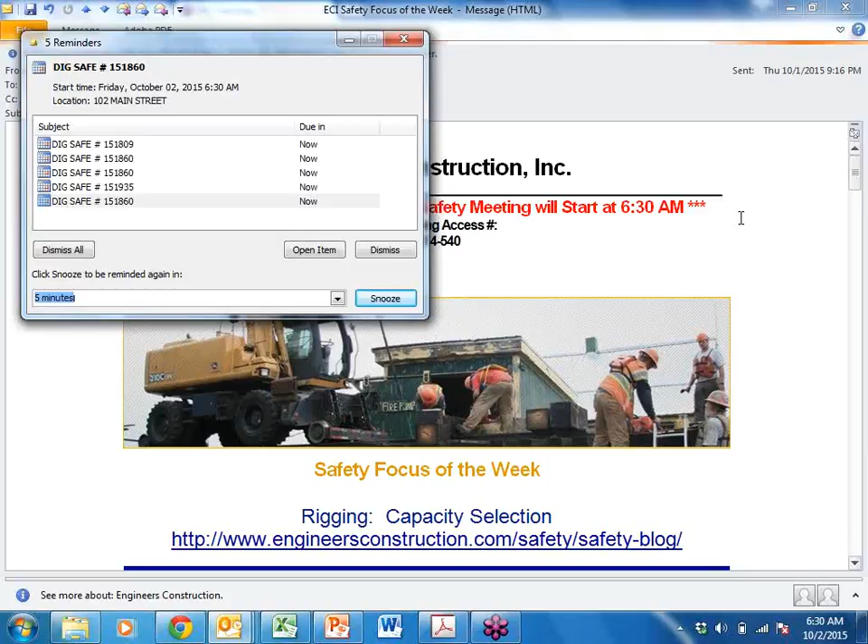Morning. Okay, it's 6:30. We'll get started here. Code of conduct item of the week is to drive safely, defensively, and courteously. And I know most of you know that I'm a bicyclist, so I really have a vested interest in making sure everybody on the road drives that way. And I'd have to say that most people are. I don't have much trouble on my bicycle, so I think people who have problems are usually people who create problems out on a bicycle.

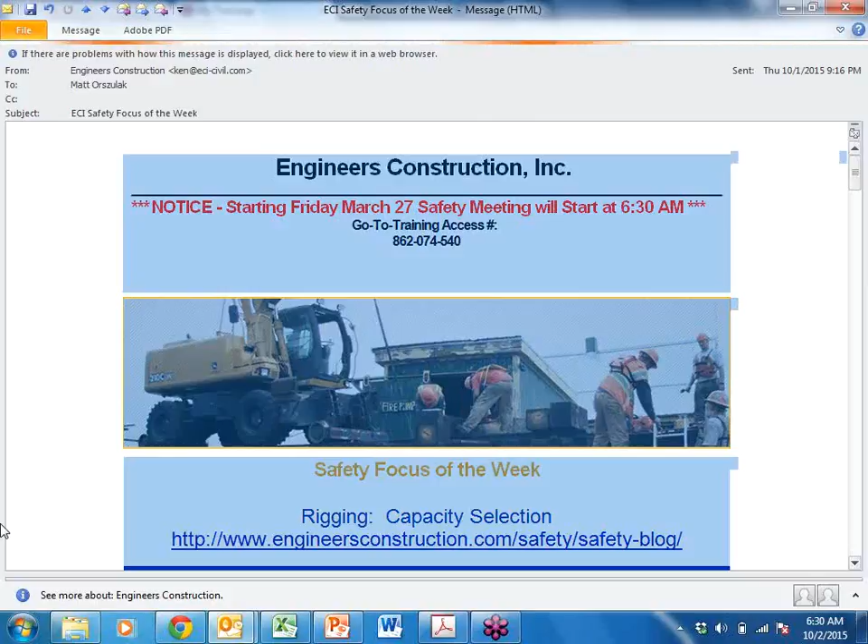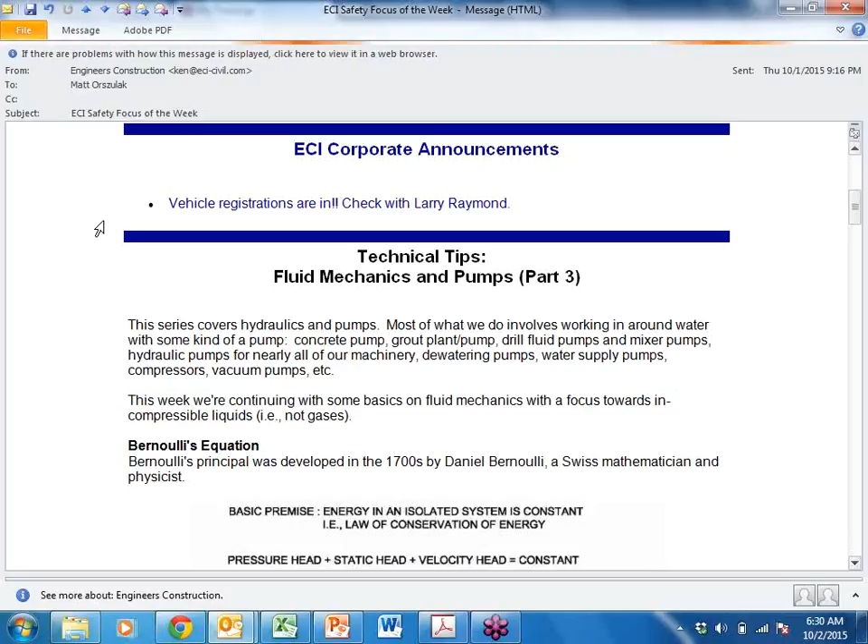So we're going to talk in a few minutes about rigging again, kind of an ongoing discussion, because rigging is obviously a fairly extensive topic for us. Corporate announcements. Larry reports to me that he has a boatload of registrations that need to be passed out. So make sure you check with him. I'm sure you've got a vehicle on these crews that needs one, right? Yeah. Between trailers and trucks and everything. So check with Larry.

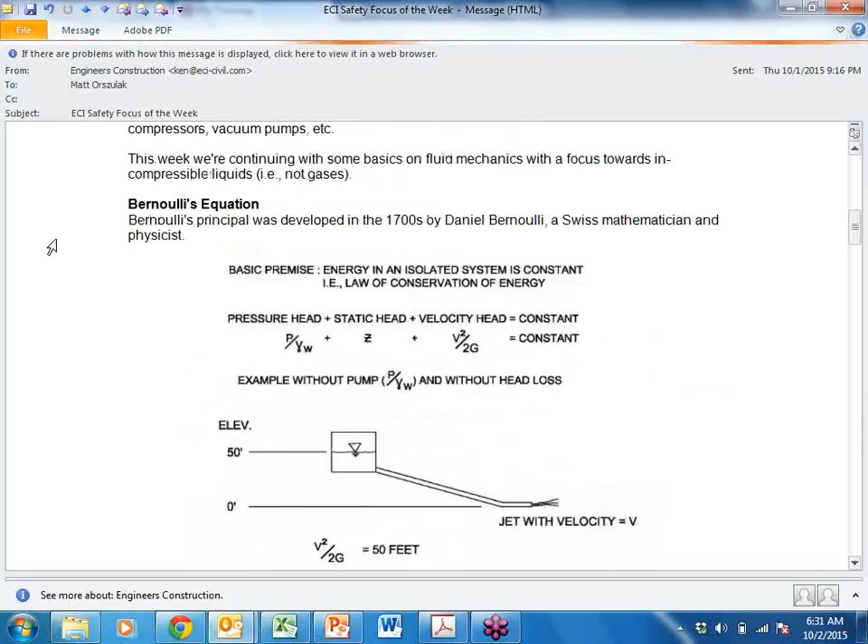Technical tips. We're still talking about fluid mechanics and pumps. There's a lot to talk about here. A lot of interesting stuff. This week, the discussion is Bernoulli's principle, which was developed by Daniel Bernoulli back in the 1700s, a Swiss mathematician and physicist. And basically, you've all heard about the law of conservation of energy, that you can't really get rid of energy out of a system or add it.

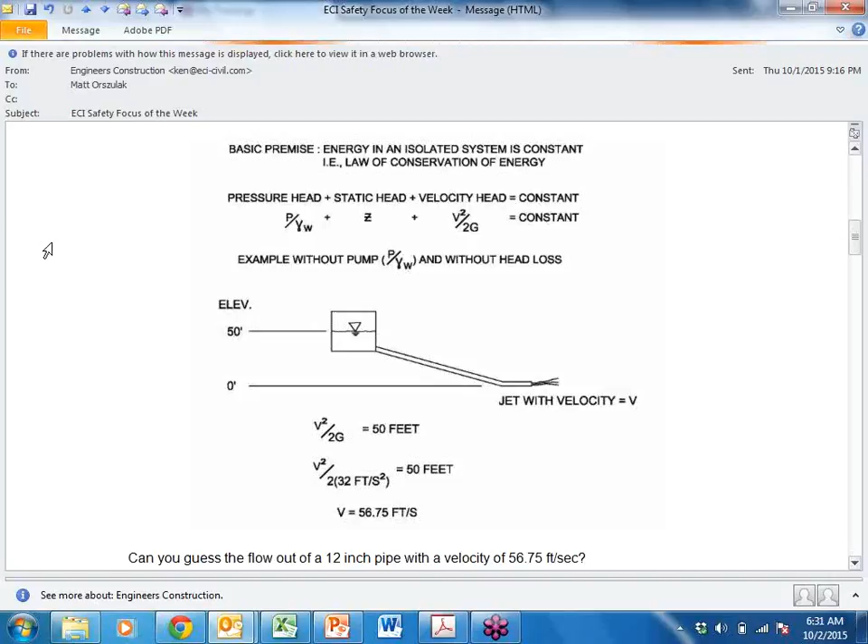It's there. So the idea is that in hydraulics, if you have a pressure head and a static head or an elevation head and a velocity head, each of these combined have an energy to them, and they're always constant. So you can't just go from a high energy state to a low without having a transition, a change in the system. So this is an example which makes a lot of sense when you think about it. Bump that up a little bit.

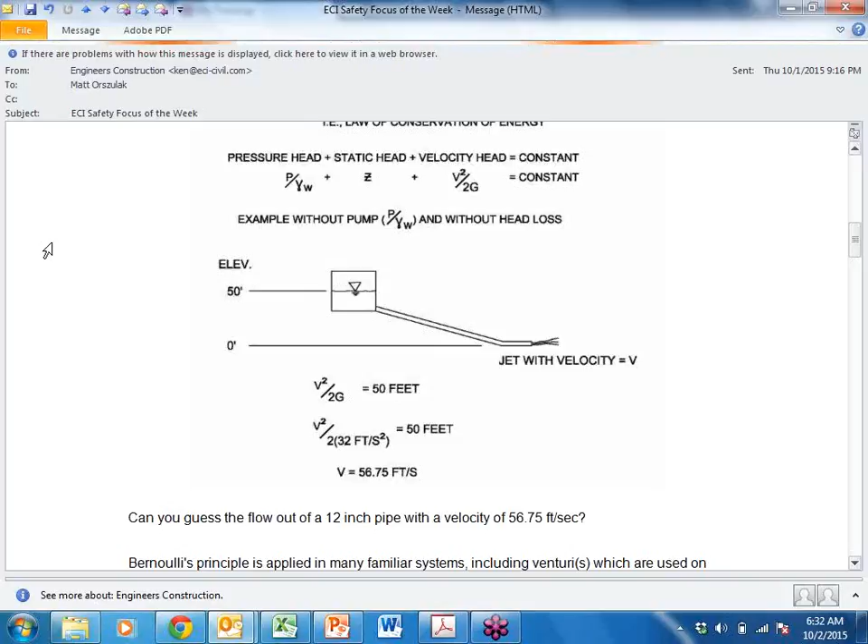So you've got a tank of water up at elevation 50, and then a line that just drains off at 0. So what happens here? You've got a state of high energy, it has high elevation, static head. This would be more like a pump pressure. I don't have a pump shown here, but you have high static head down to 0. Well, what happens? It moves, right? It gains velocity. The velocity head goes up. Since this essentially goes to 0, that goes very high.

And interestingly enough, you can actually compute what that velocity is. It's V squared, divided by 2 times gravity. And actually, the units all fall out perfectly because you've got basically a V, and then you divide by feet per second squared, and you have elevation in feet, and it all breaks out to feet per second. So kind of cool. You can figure out at your jet what your velocity is.

So why is this important? Well, one thing that this looks like is a directional drill, doesn't it? With drill steel, with fluid pushing through in a jet at the end. I'm going to change it to be a large diameter jet of 12 inches, and I'm asking a question here: can you guess the flow out of a 12-inch pipe with a velocity of that 56.75 feet per second I computed? We'll get to that at the end.

But the point here is you have a high energy, high pressure, or pressure head, elevation head state, and then it goes down to 0. So all that gets converted into velocity. So there's some other interesting applications of this principle, including Venturis. And the Venturis are used on mud mixing systems in addition to a variety of things.

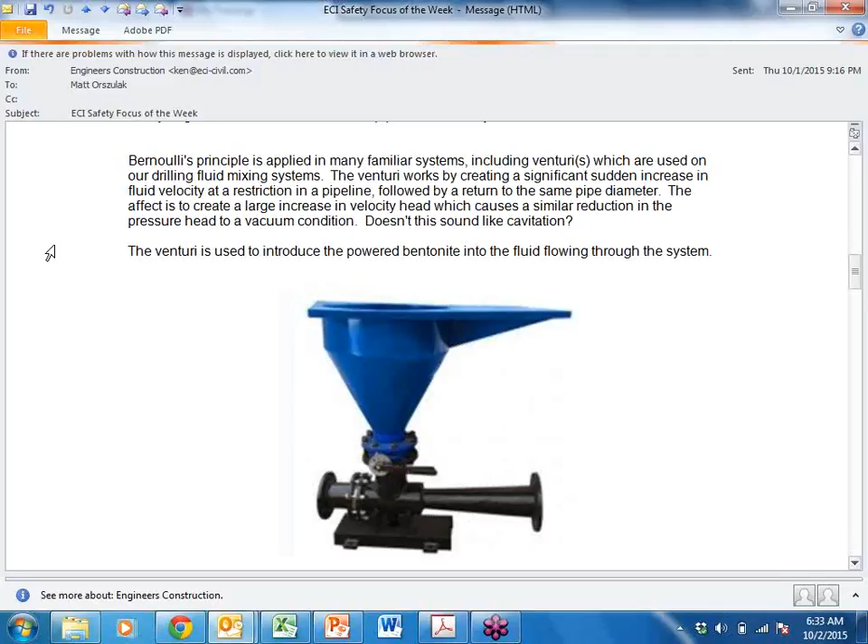But the idea is that you have a flow going through a pipeline, and it suddenly is constricted to a small area. So what happens then? It goes faster. When it goes faster, the pressure drops. When the pressure drops, it creates a negative pressure into the hopper, and it sucks in, in this case, the powdered bentonite and mixes it.

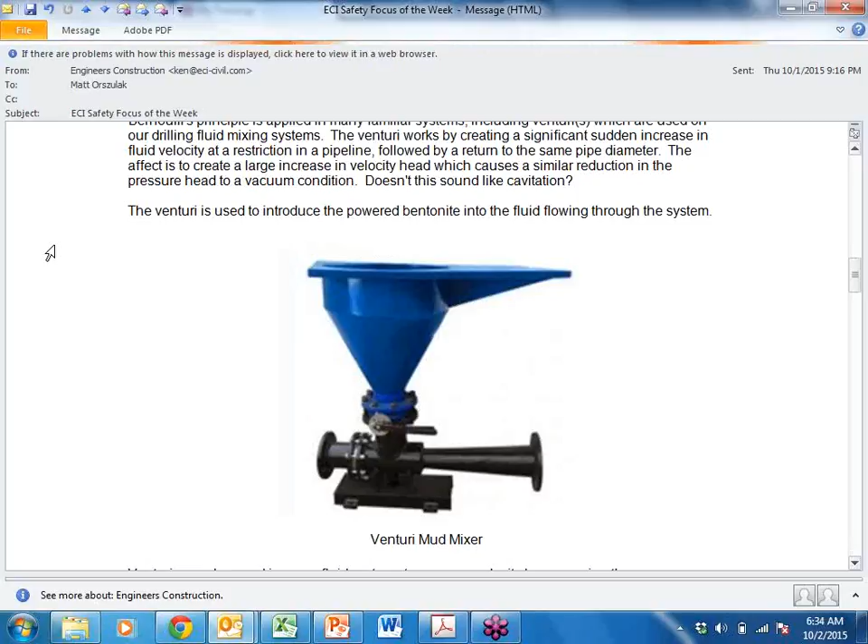And Venturis are pretty common in a lot of places, and are even used for measuring flow. This is kind of a fancy one here, but they're used for measuring the velocity and flow going through the pipe, because they can measure the difference between the pressure on the big diameter and the little diameter, and using that equation, anybody can figure out what the flow is, because velocity is related to flow.

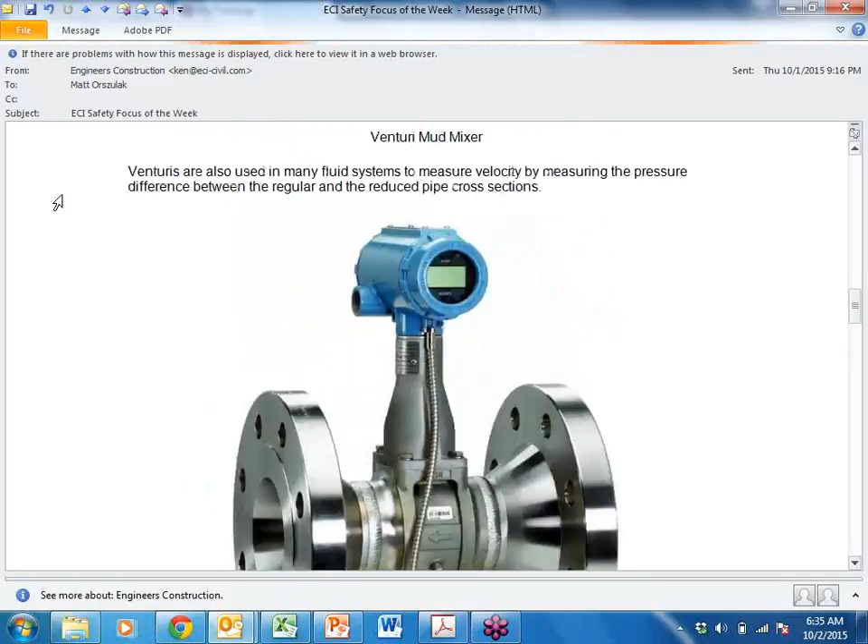And then my example, if we have the 12-inch pipe, that's 0.785 square feet in area, times that velocity is 44.6 cubic feet per second. It all comes out at 20,000 gallons a minute. So if you had a tank up there that's just letting it all loose, and remember this is without friction, kind of idealized, no losses at the jet, no losses in the pipe, no losses at the entry point, you'd have 20,000 gallons a minute coming out of a 12-inch pipe. So that also gets you thinking, well, if I have a water line that breaks and there's a water tower up there, that's a serious thing.

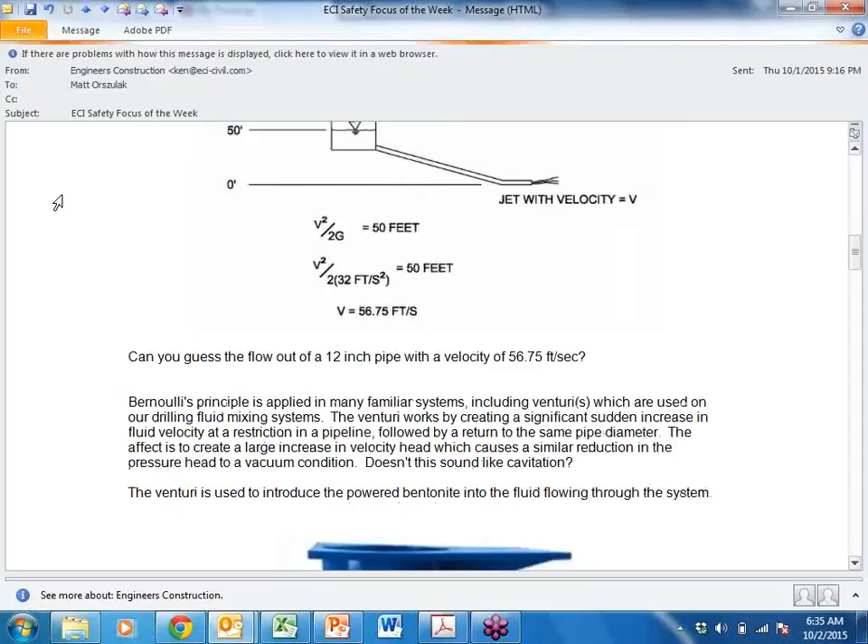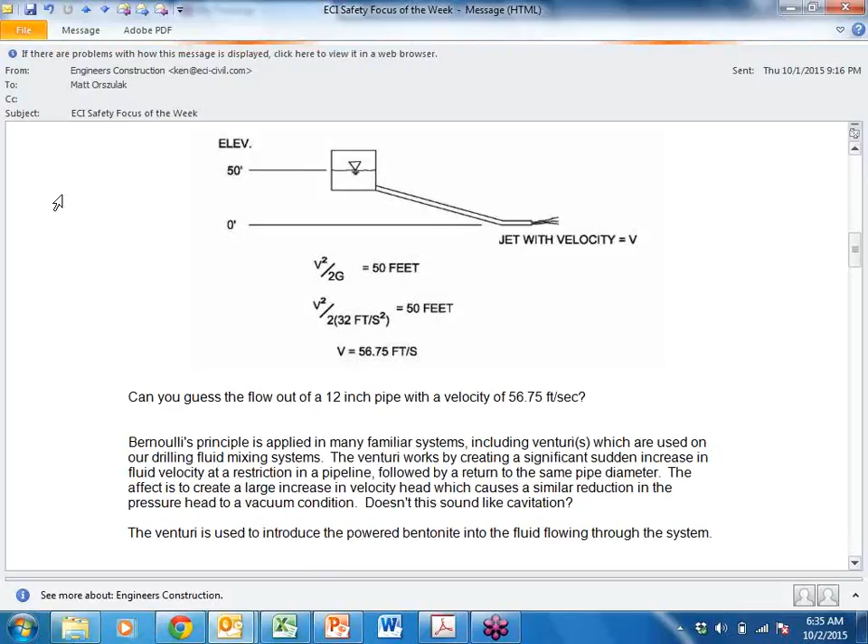And it's going to come down like that and be a real quick disaster, as we've sometimes seen. So that's just the principle, and it's kind of obvious when you think of it that way. Yeah, you have a lot of pressure, and then it converts that to a velocity. And if you think about it, also like say your garden hose, you might have 75 psi if you get real good pressure at home in the garden hose, and then once you squeeze the nozzle, the pressure drops in the hose. It all converts to velocity. Not all of it, but a lot of it.

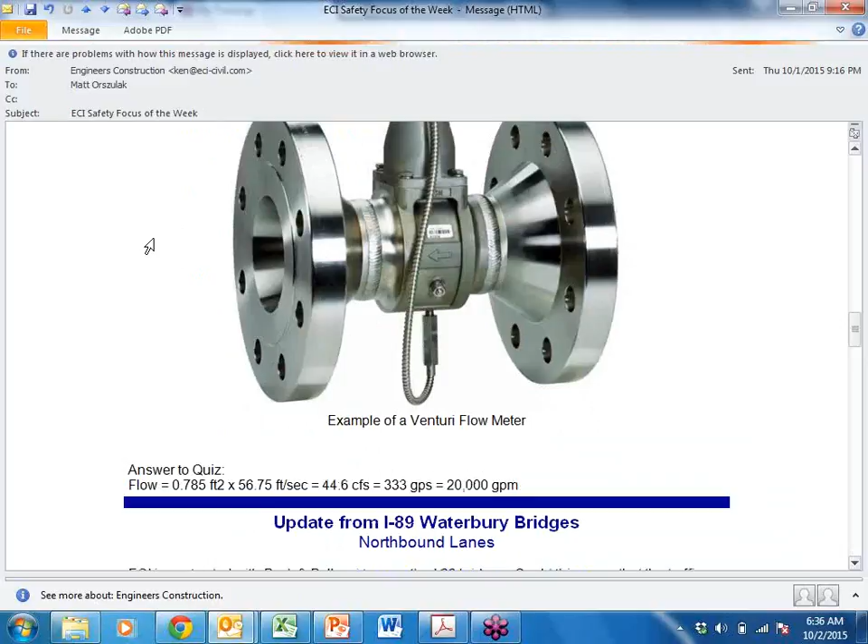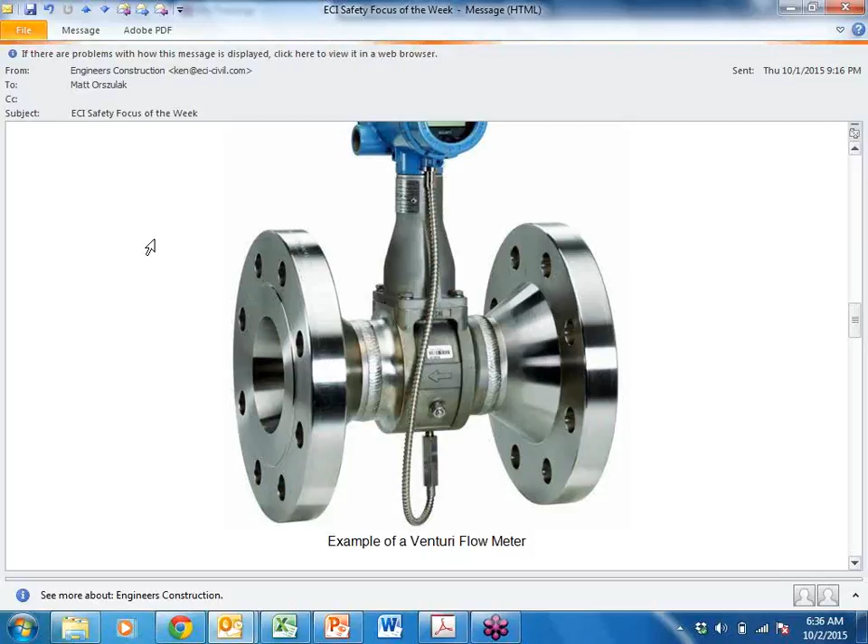That's a pretty fancy one. We have these venturis on a lot of things, right, Larry? A lot of components, whether it's measuring any kind of hydraulics or mud or anything or water. And sometimes they just use even a plate in there and measure it at the plate, before the plate, and after the plate.

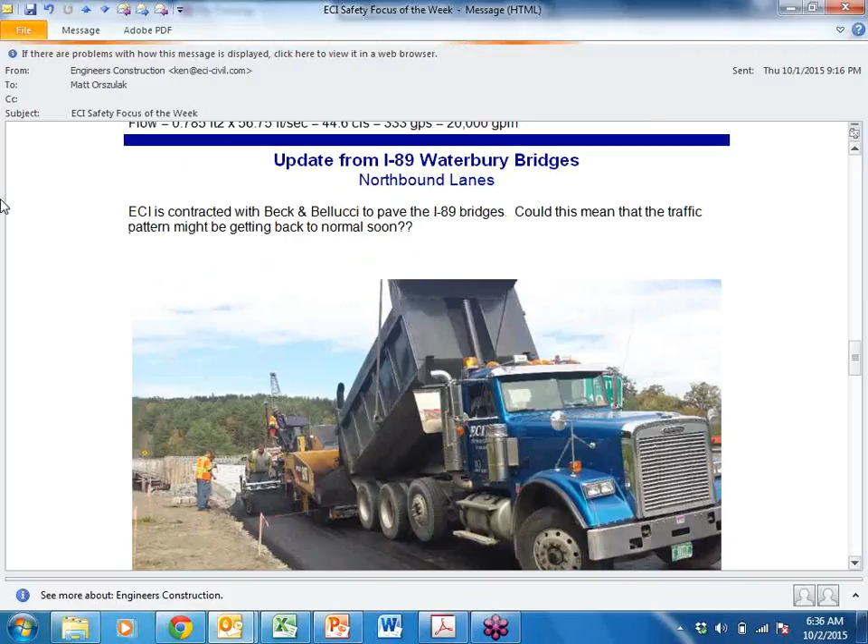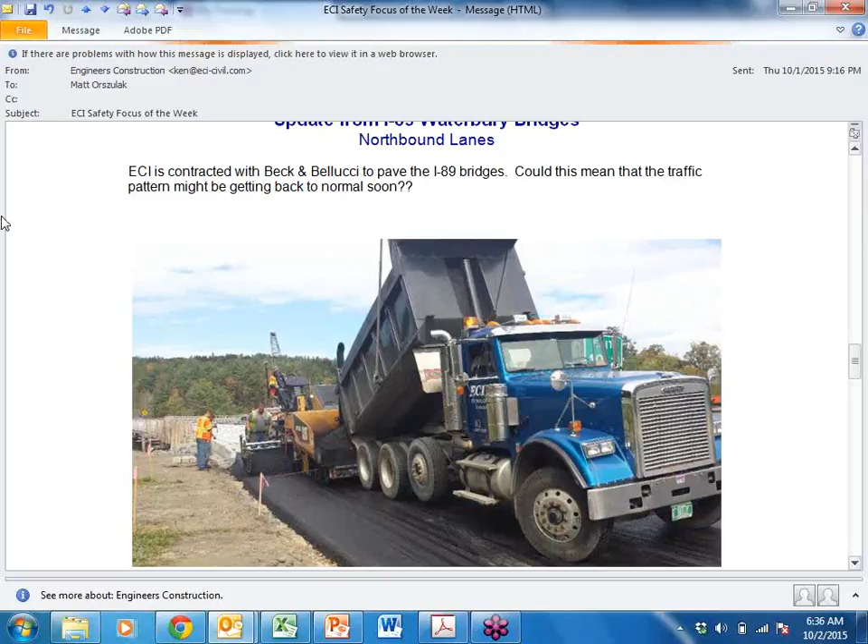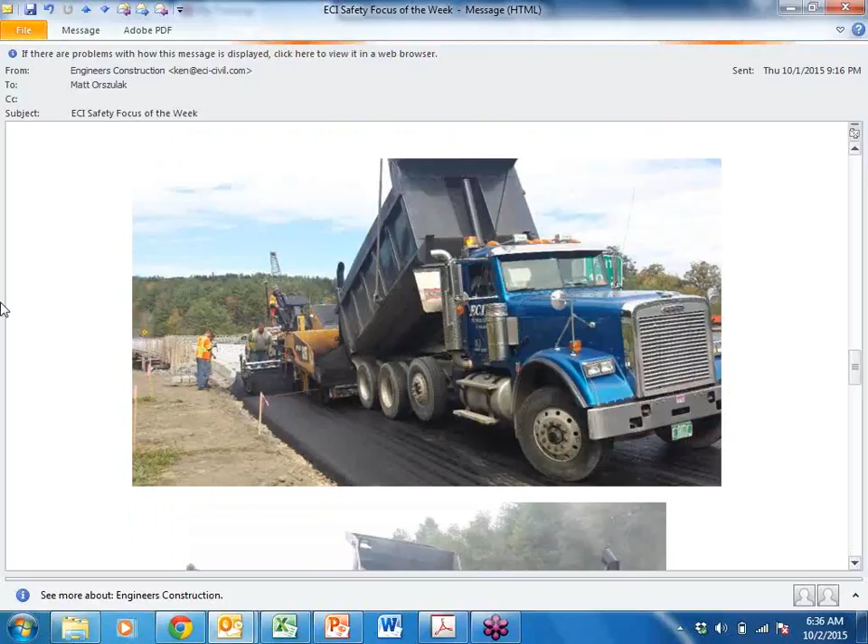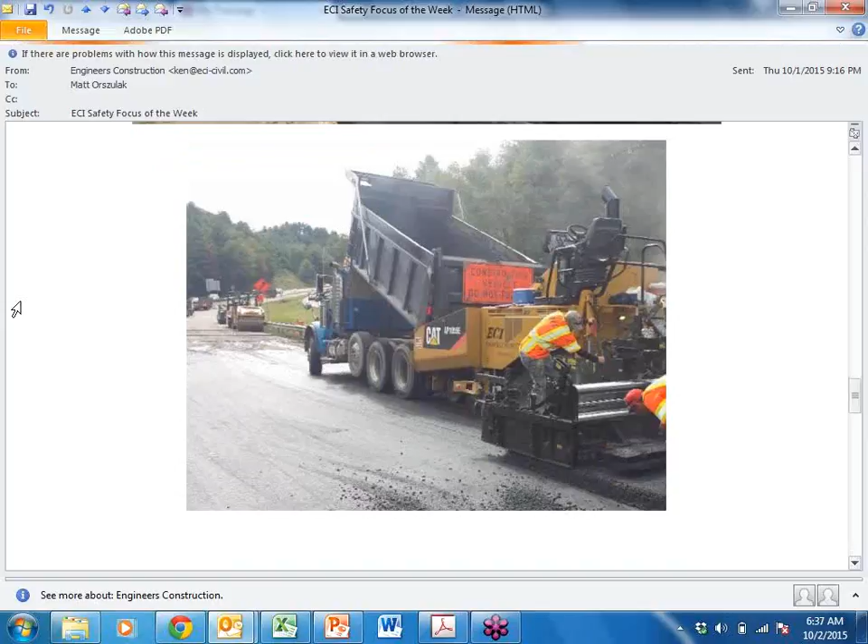So I have an update here from the I-89 Waterbury bridges on the northbound lanes. I thought this was pretty interesting because I'm kind of assuming that this could mean that the traffic in Waterbury on 89 could be getting back to normal. Would that be true? Anyone know? Yeah, they're hoping by the end of next week. Wouldn't that be great? The bridges are done paving, and finishing the temporary off-ramp will be all next season. That northbound Waterbury off-ramp will be totally rebuilt next year. Oh, okay. Paving the temporary one in preparation for next spring. Yeah, bridges are. He's hoping by next Friday or so. That's good, because everyone, myself anyway, traveling through there, you're going down to one lane and dealing with it in the slower speed, I'm ready for a change on that. So that's good.

All right, well, that's what I got. We're going to actually have a video today on rigging? Yep, video. Okay, good. So change it up a little bit. The last couple of weeks we talked about our inspections of wire rope, chain, and synthetics. Today I got two short videos about our hitches with chain, wire rope, and synthetics. It's good detail, talks some good proper rigging techniques, the difference between the basket, the choker, the bridle setup, and basket choker, and the straight pull. So we'll get started on those.

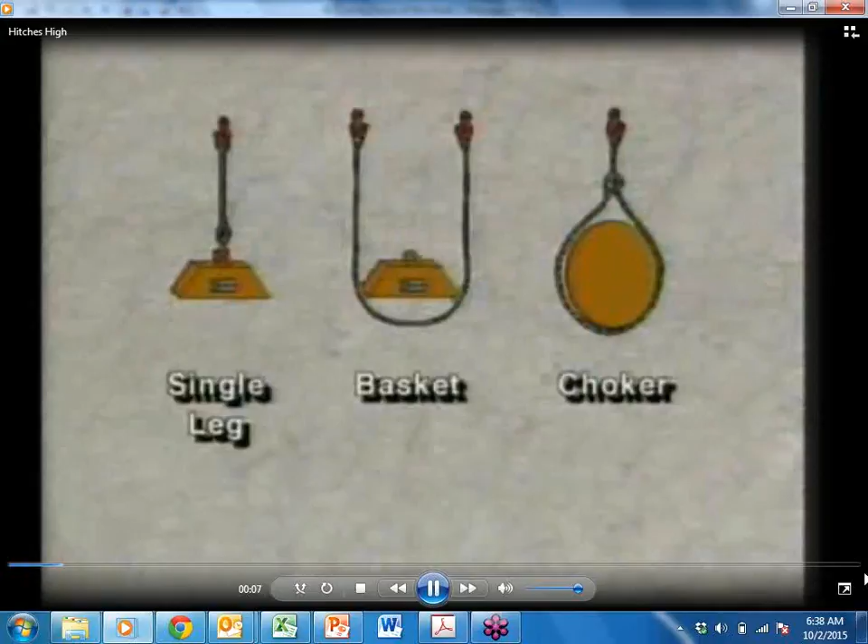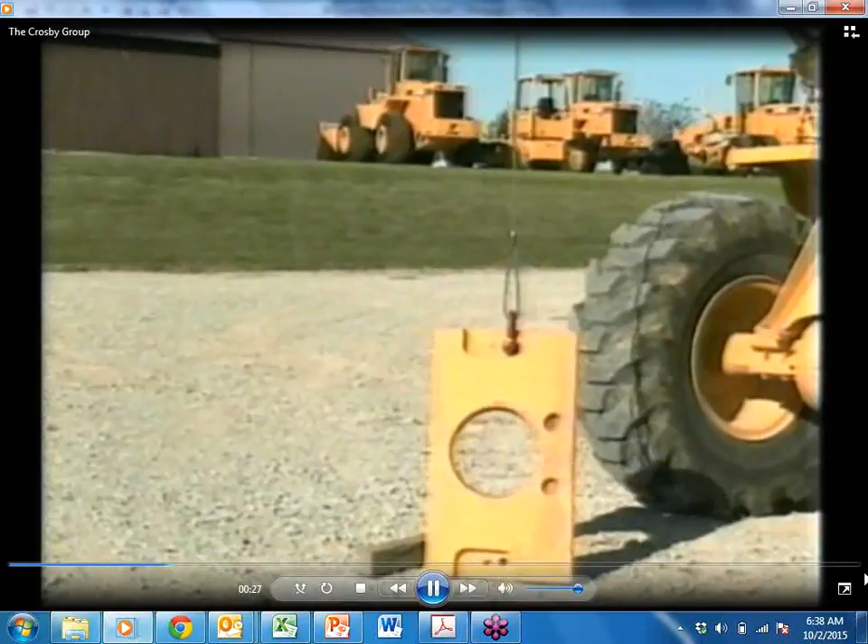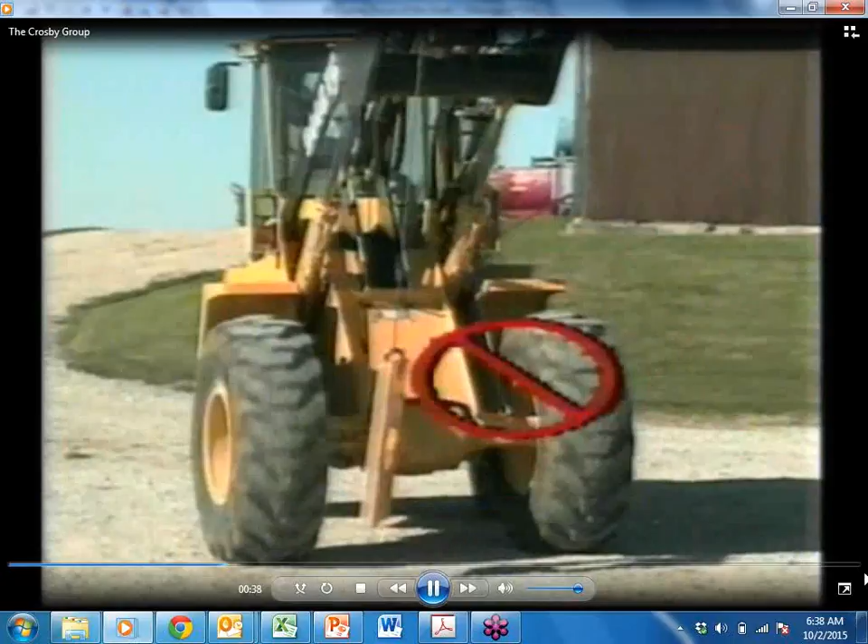For our purposes in this program, we'll discuss three basic rigging hitches: the single leg, the basket hitch, and the choker. The single leg hitch is the simplest. If the sling you're using, be it chain, wire rope, or webbing, is rated for a certain load capacity, that load capacity is the maximum weight you can hang from this hitch. Exceed the capacity, and you run the risk of an accident. A single leg is simple to hook up, but it offers no load control. It's fine for very basic lifting and setting, but don't try to move a load that's suspended by a single leg, unless it's controlled by a tag line.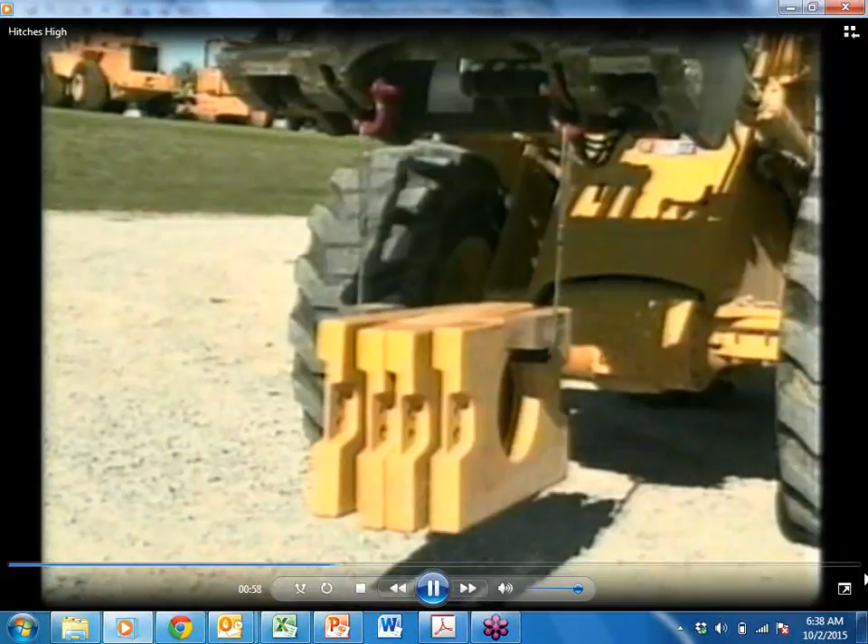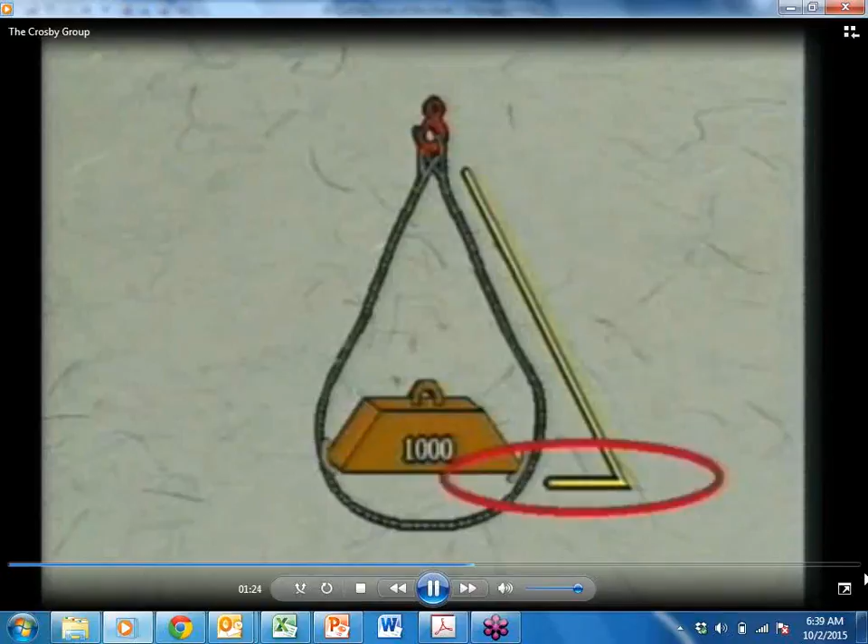The basket hitch distributes the load between two legs of a sling. A true vertical basket hitch has twice the capacity of a single leg sling. The catchwords there are true vertical basket hitch. This is a true vertical basket hitch. This is not. When you go from this to this, you reduce the capacity of the sling. How much you reduce it depends upon this angle. It's called the horizontal angle. Here's the horizon line. Here's the line of the sling. The angle between them is called the horizontal angle. The smaller or tighter this angle, the more you reduce the load capacity of your sling.

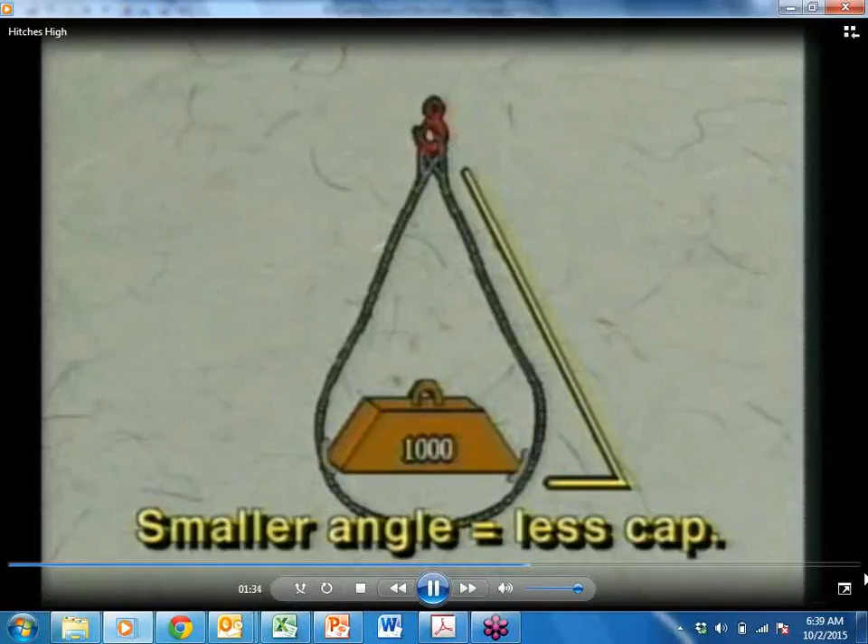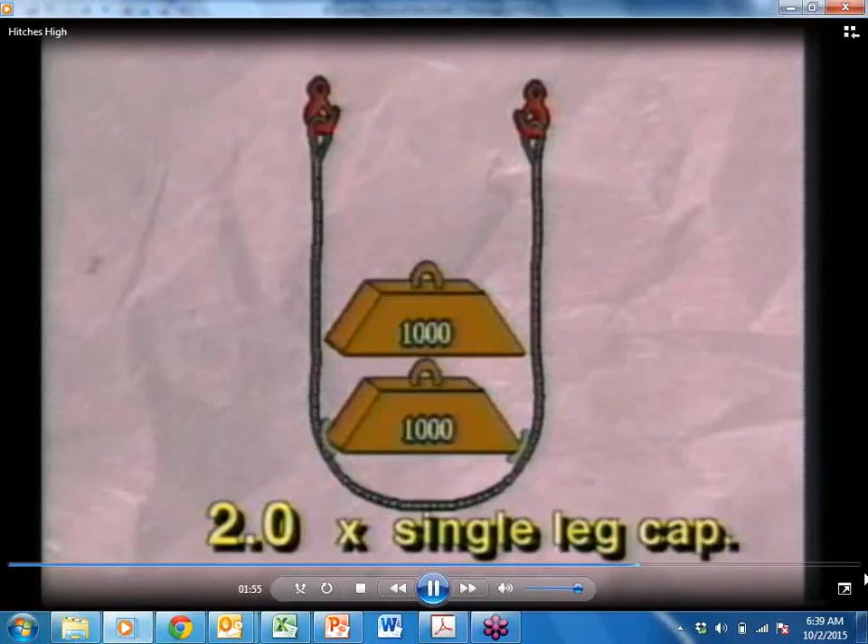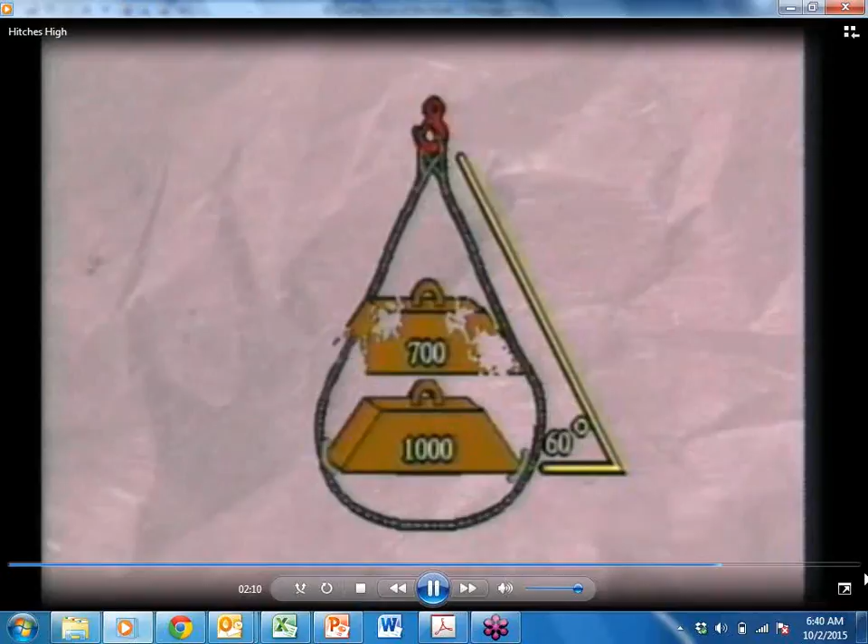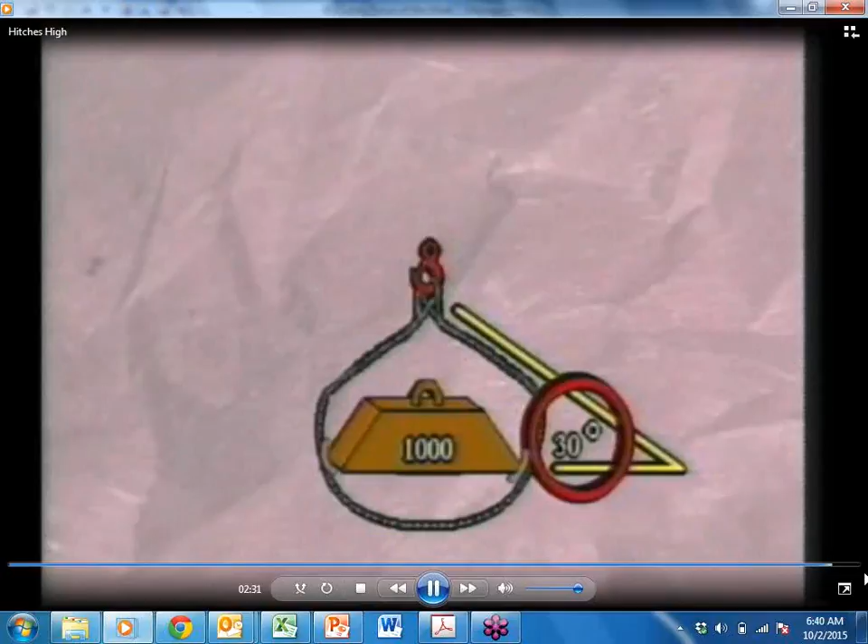To illustrate, the capacity of this single leg sling is 1,000 pounds. That's how much you can hang from it straight down. Take the same sling and make a basket hitch, a true basket hitch. The capacity of that same sling is now 2,000 pounds. That's double the single leg sling. Now connect both ends to a common point. You've just reduced that sling's capacity. When the horizontal angle is at 60 degrees, its capacity drops from twice that of a single leg to 1.7 times that of a single leg. When the angle is 45 degrees, it drops to 1.4 times. And when the angle is 30 degrees, it drops to 1.0 times, or the same capacity of a single leg sling. So remember that this angle, the horizontal angle, is important in determining the sling's load capacity.

So that's kind of straight and basket, and I have another one here for more of the bridle setup.

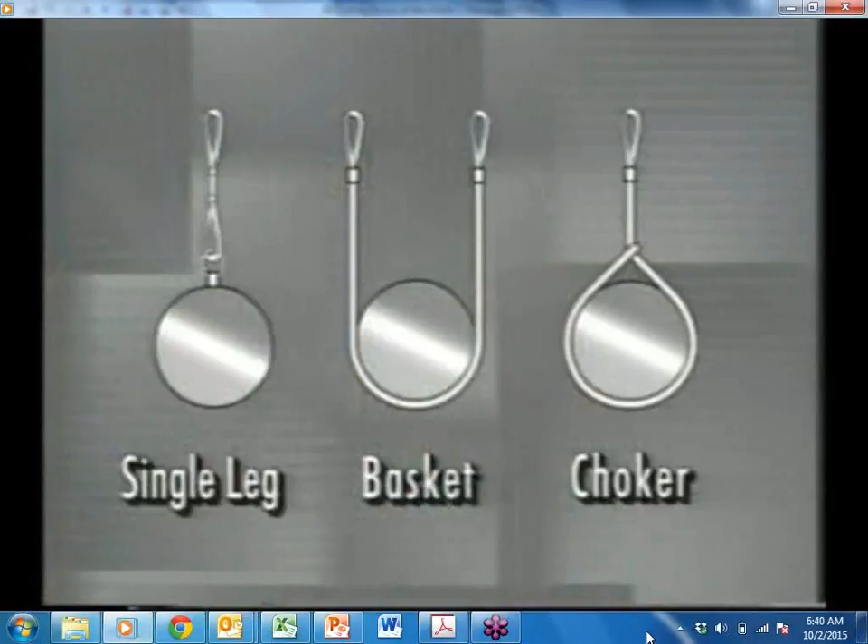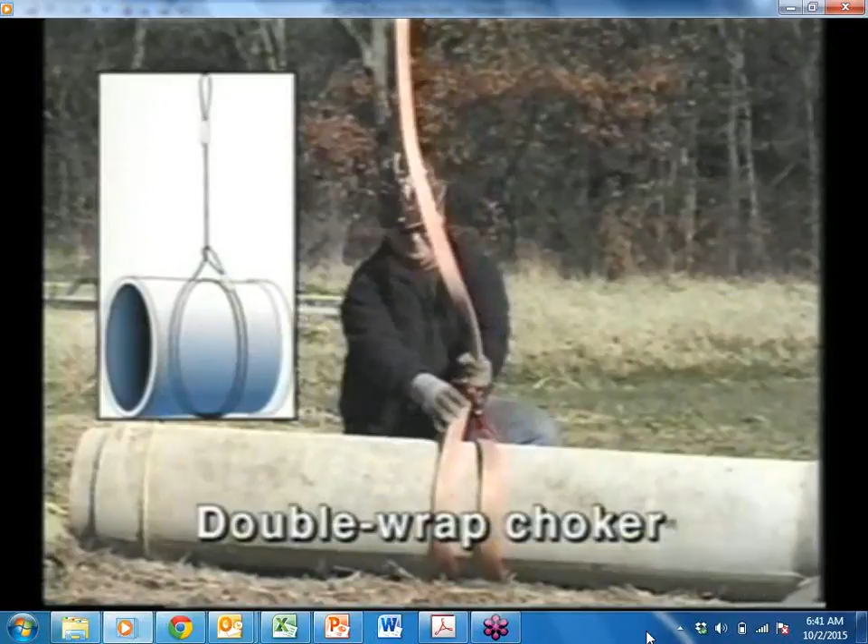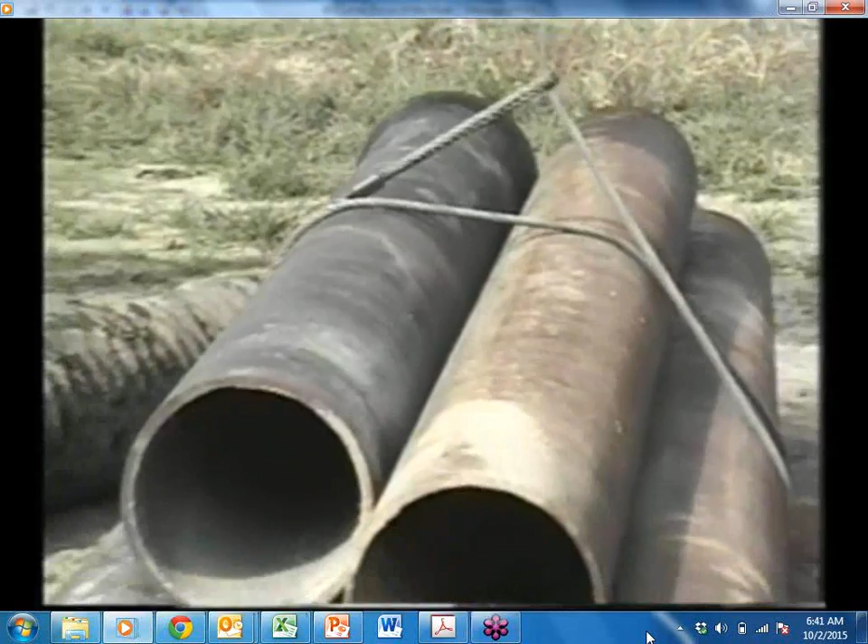The three basic rigging hitches are the single leg, basket, and choker. Here are a few tips to remember when using any of these hitches. Choker hitches are easy and convenient, but a double wrap choker hitch is better because it increases the surface contact between the load and the hitch. More surface contact means better control. It's excellent for use on loose bundles or slippery loads. It draws the load in, increasing surface contact and helping prevent slippage.

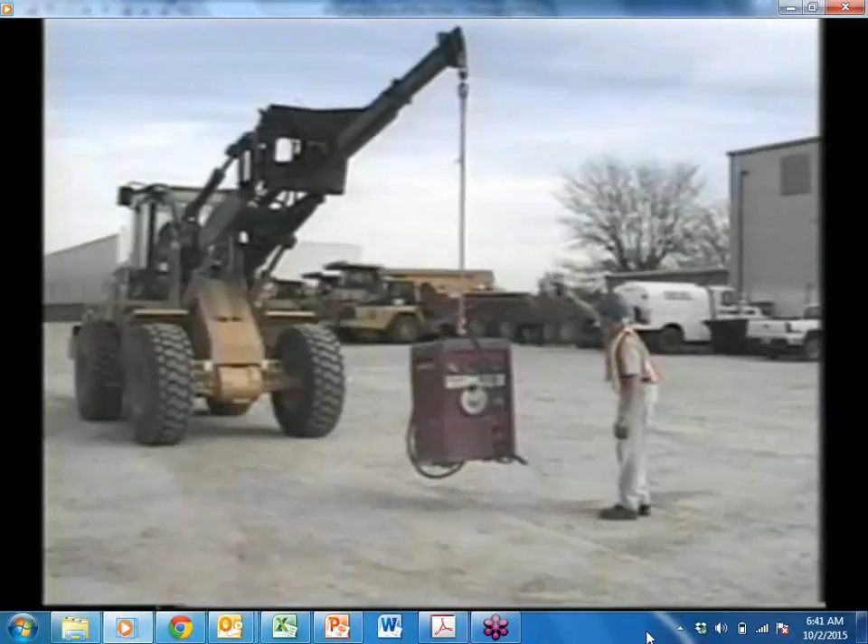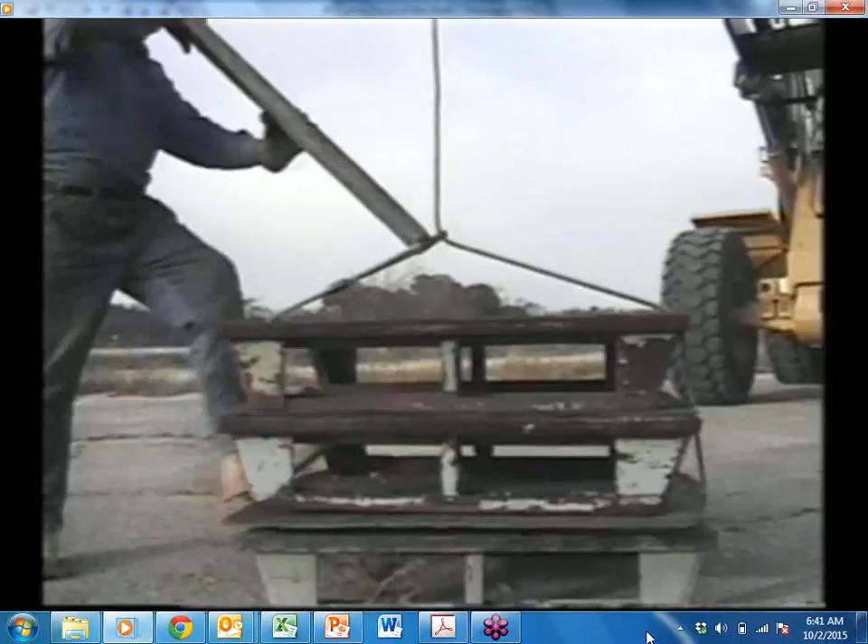Sling capacity is measured in a straight line pull. Choker hitches do not pull in a straight line. Force develops on a choker hitch right here. The tighter this angle, the more the sling's capacity is reduced. When riggers beat the eye of a choker down to gain surface contact, they reduce the capacity of their sling. A better way to gain surface contact is to use a double wrap choker, or insert a block of wood.

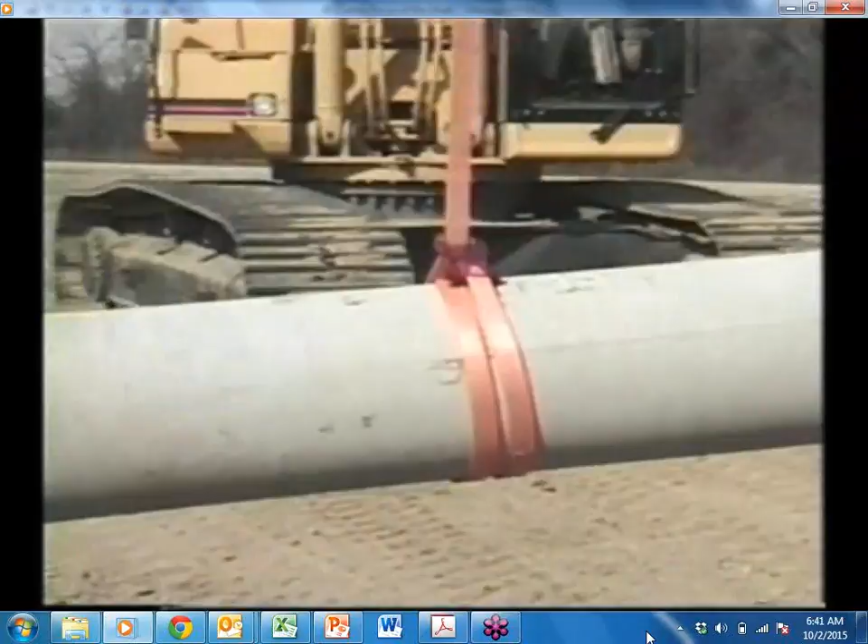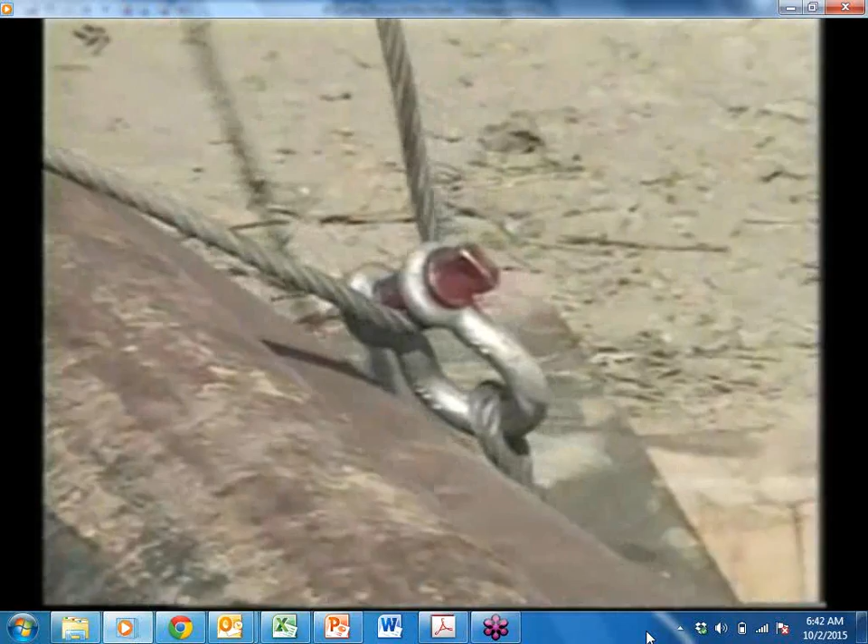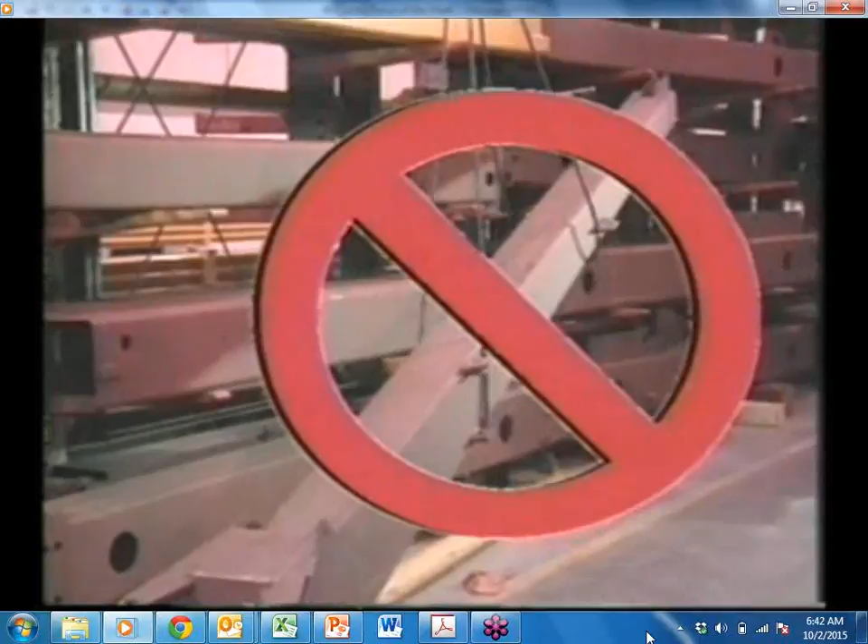An easy way to form a choker is to use a shackle. This puts less stress on the sling eye. Be sure to put the pin of the shackle in the eye of the sling. Otherwise, the pin can unscrew. A convenient way to form a choker hitch with synthetics is to use a choker hook. When using a basket hitch, be sure to balance the load to prevent slippage. The legs should be an equal distance from the center of gravity.

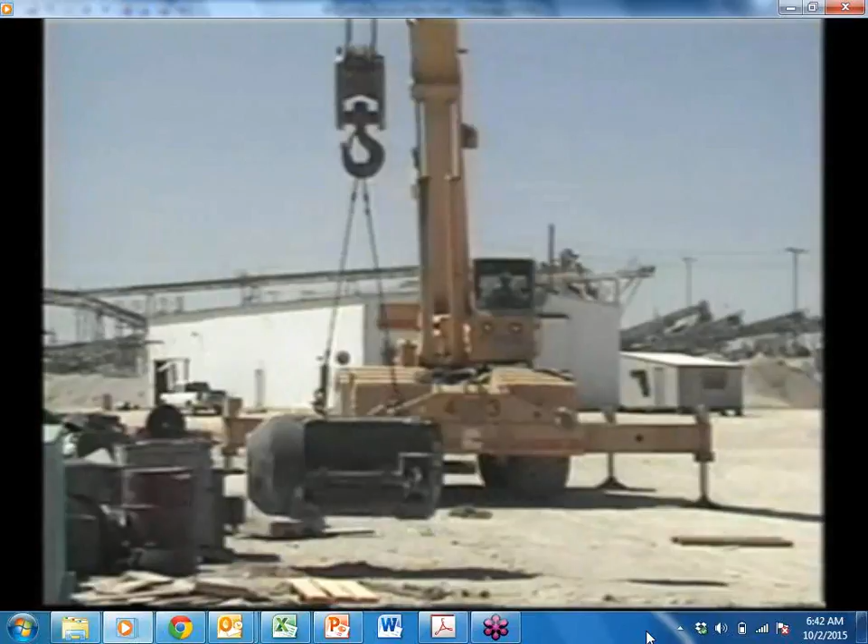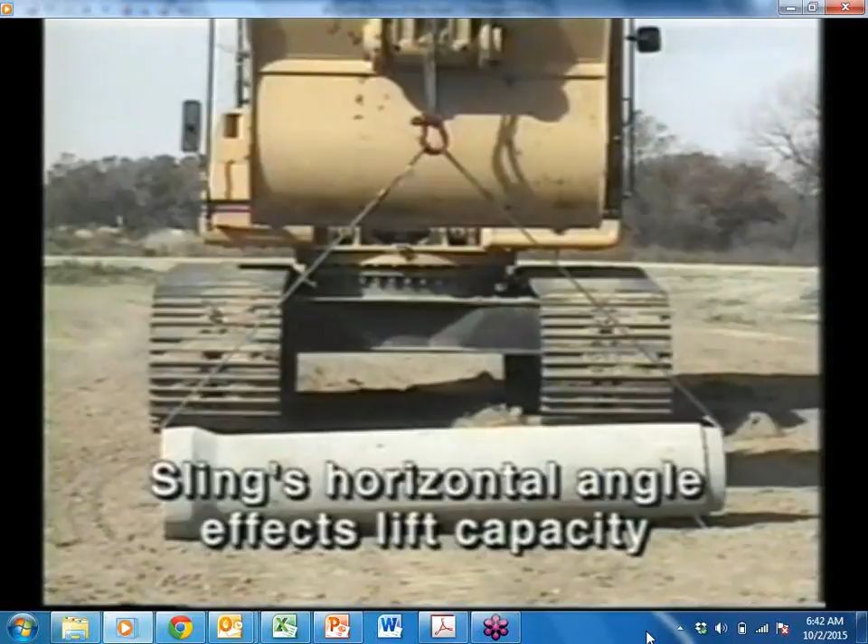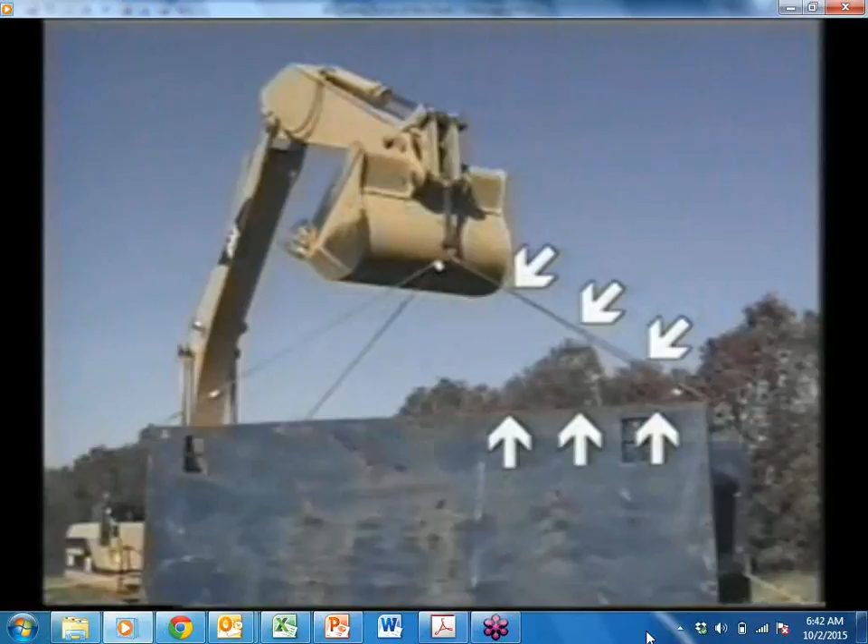When calculating sling capacity, remember that the sling's horizontal angle influences sling capacity. Slings are rated by a straight line pull, but if the sling is angled, its capacity is reduced. For example, look at the difference in rated lift capacity between the vertical leg and the choker hitch. It's important to remember that for any sling and any hitch, the more your sling pulls on an angle, the more its capacity is reduced.

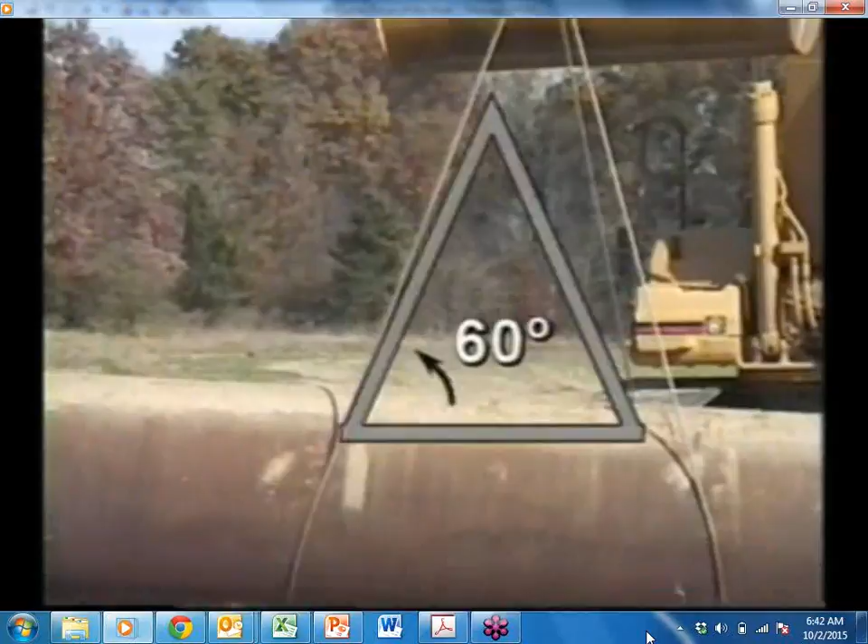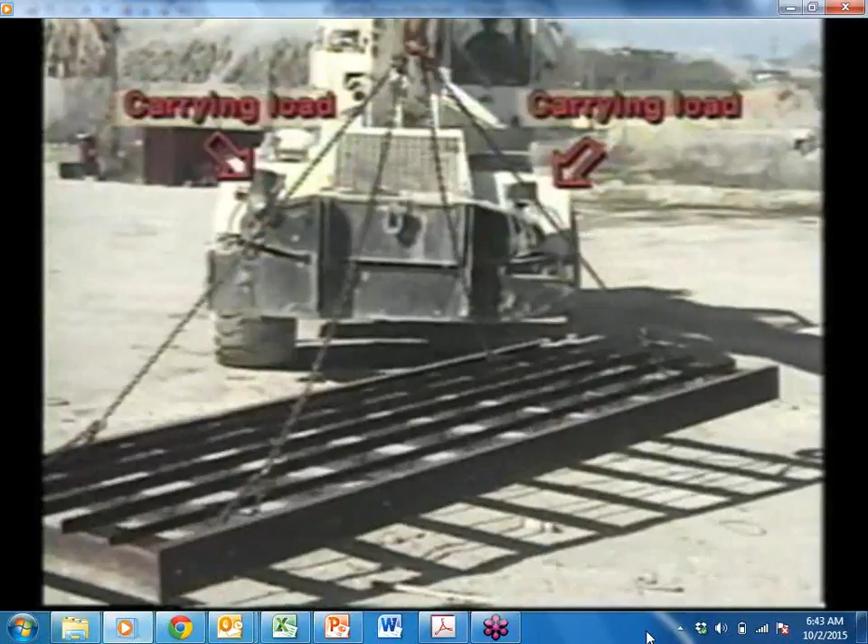Try to keep your sling angles greater than 60 degrees. This means your slings will have to be long enough. Here's a quick way to tell. If the free ends of the slings are at least as long as the distance between the two pick points, your angle is at least 60 degrees. Be aware that with four-leg slings, it is possible that only 2 legs are carrying most of the load, while the other legs are simply balancing it.

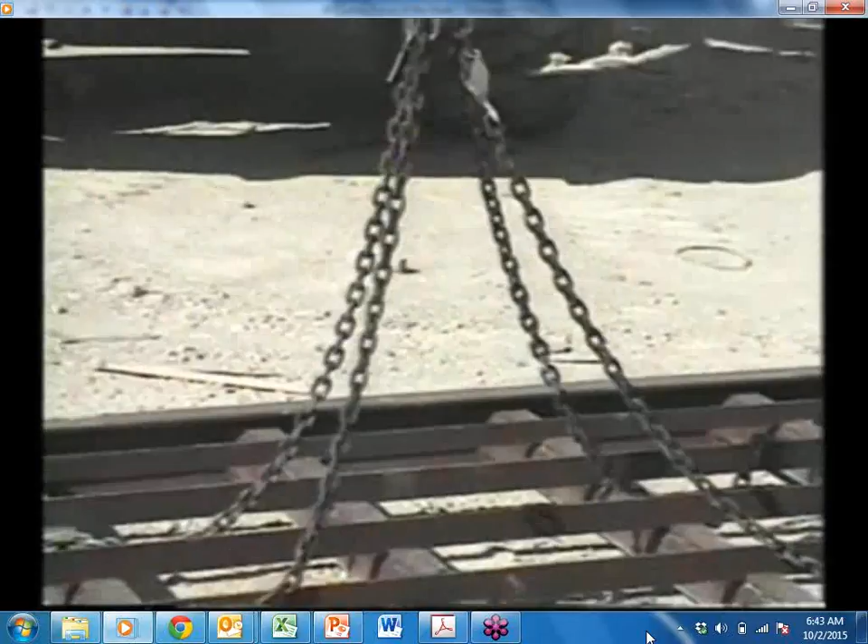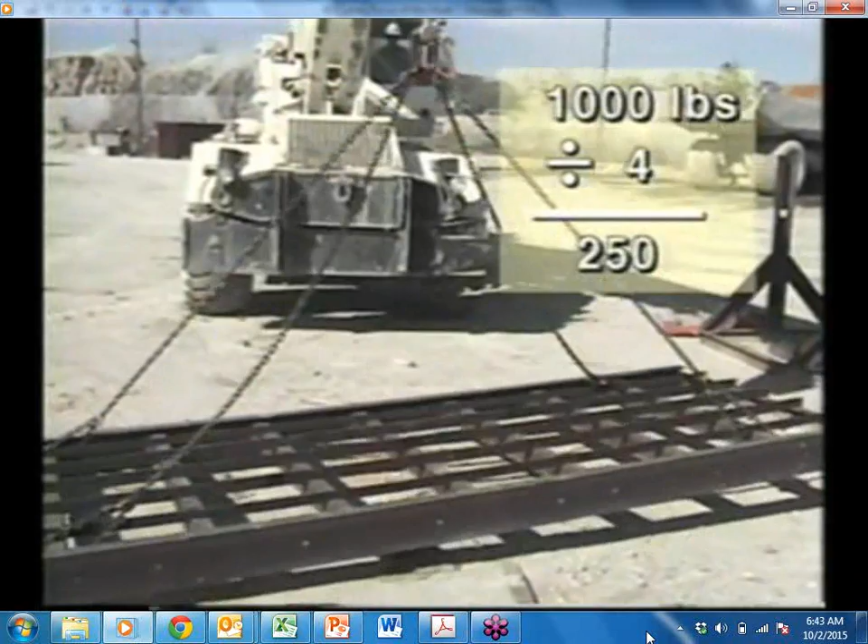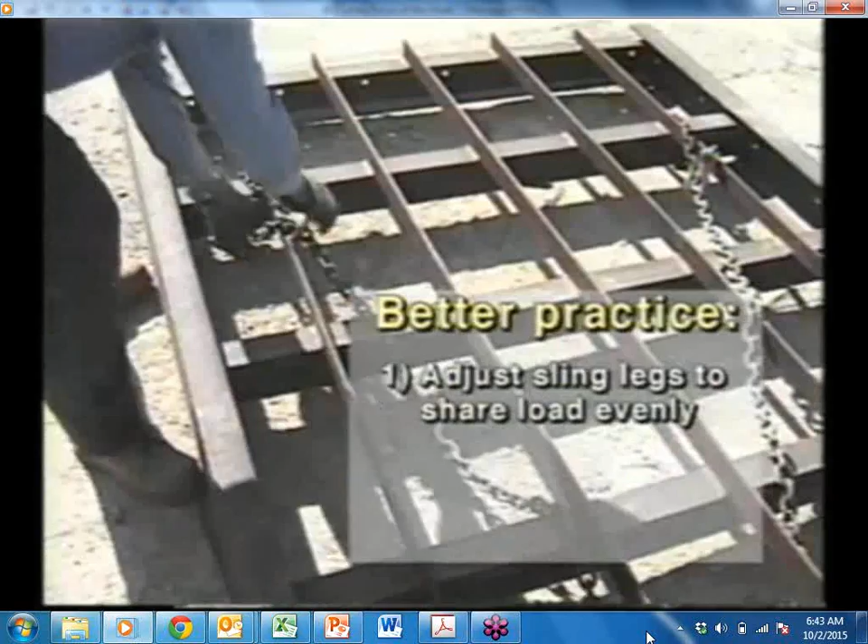A tip to remember here is that when calculating a 4-leg sling, figure it as only a 2-leg sling. Let's say this scaffold weighs 1,000 pounds. Your first instinct might be to say, I've got 1,000 pounds, and I'm lifting it with 4 legs, so each leg only has to be rated at 250 pounds. That could get you into trouble, since only 2 legs are actually carrying the bulk of the load. A better practice is to adjust the length of the sling legs to share the load evenly, and figure the rigging as a 2-leg sling, each 500 pounds. Once again, the sling's horizontal angle will also influence sling capacity.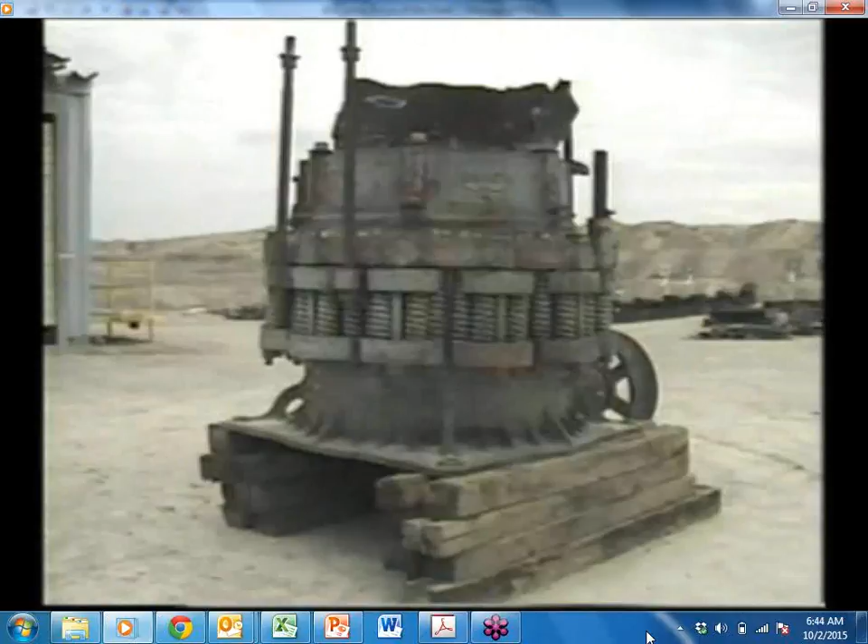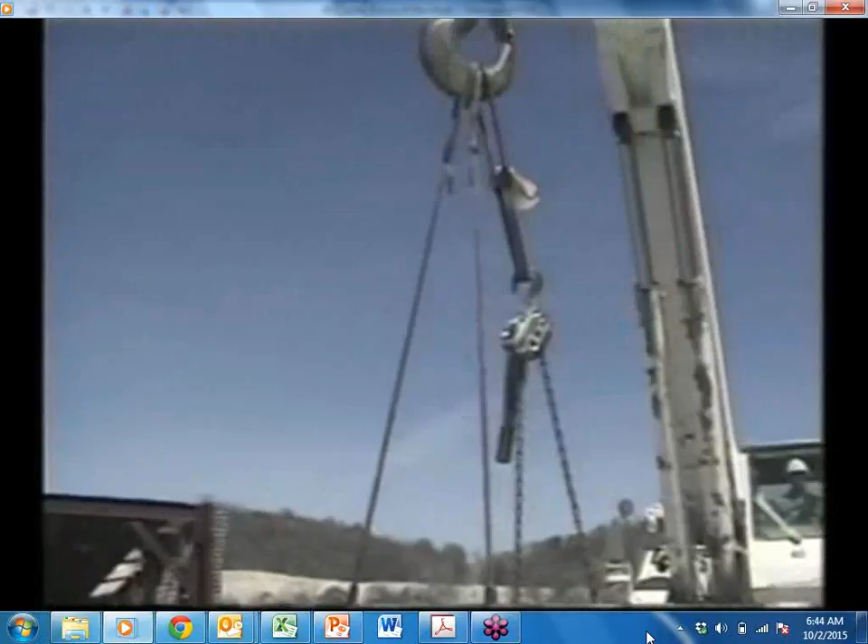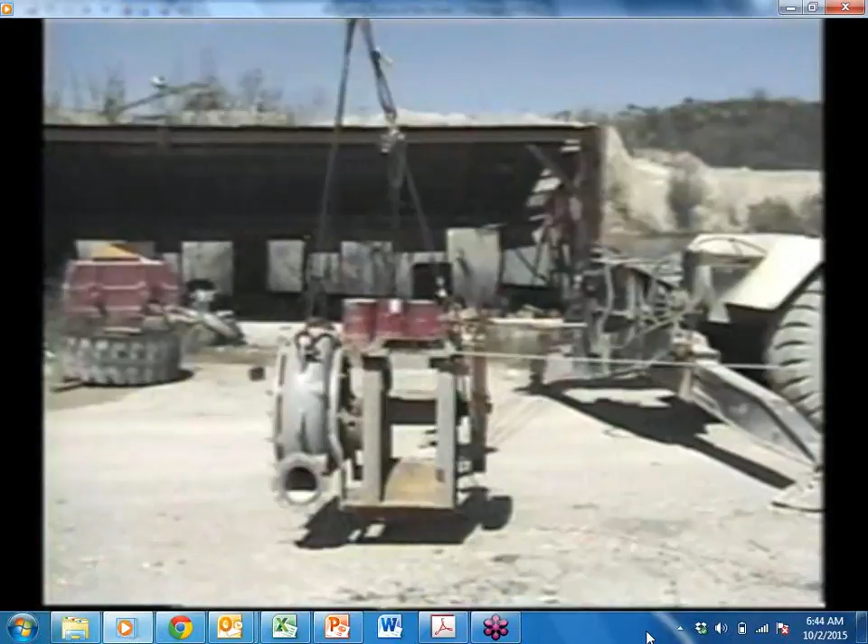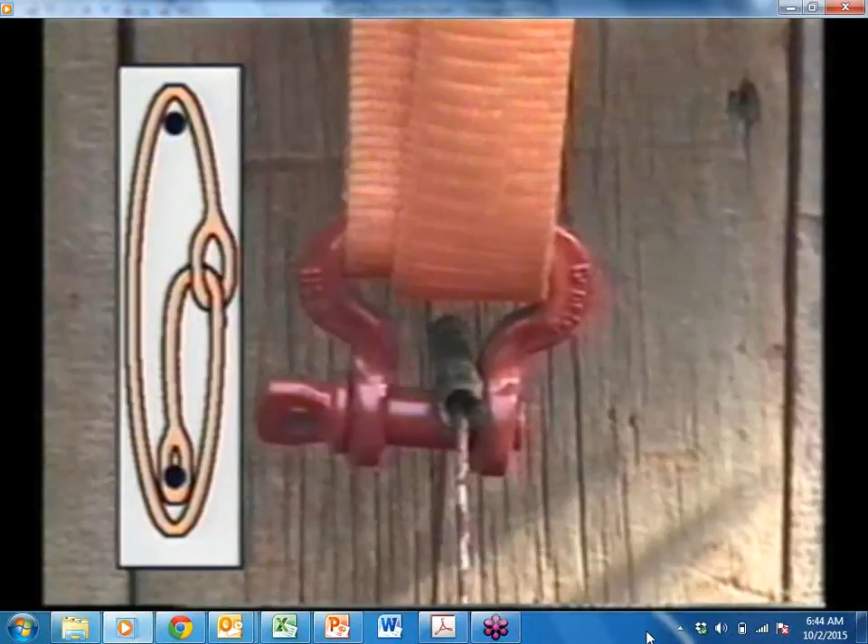Odd-shaped loads must be carefully analyzed to prevent any part of the rigging from being overloaded. Always lift level. One technique is to use 2 legs with an adjustable 3rd leg. The load is test lifted, and the 3rd leg is adjusted until the load lifts level. The third leg can be a chain fall or a turnbuckle. You can also create an adjustable leg with a synthetic sling, a sling saver, and a specialty shackle. Moving the sling eye up or down changes the length of the sling leg.

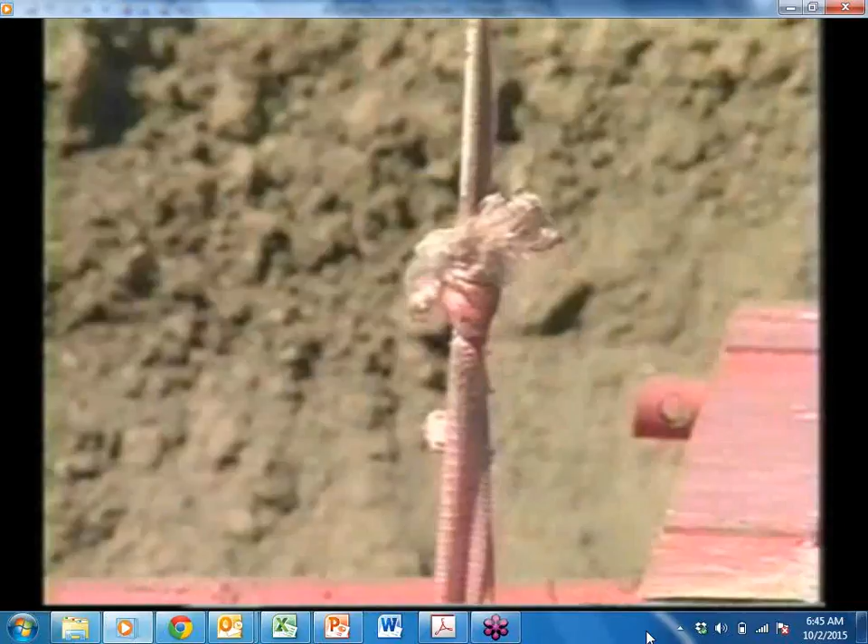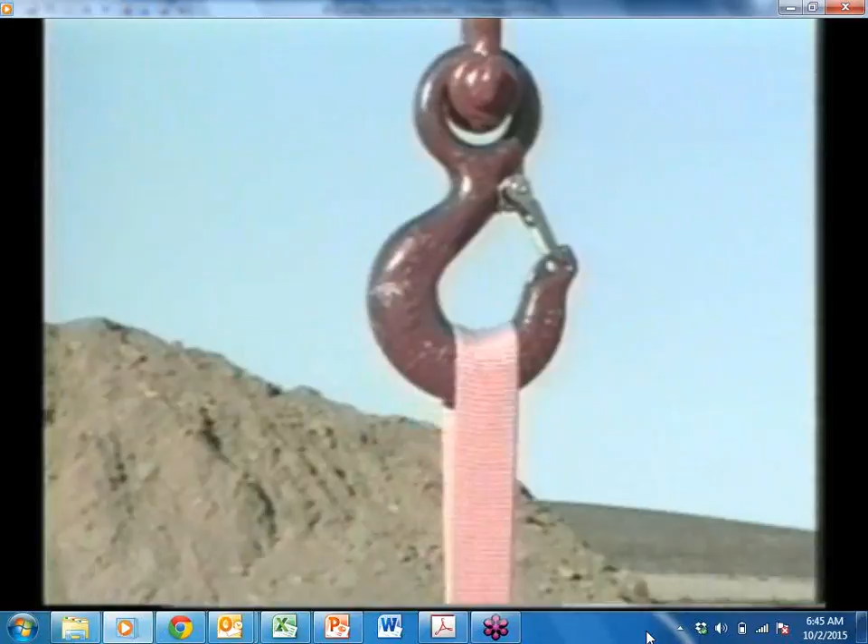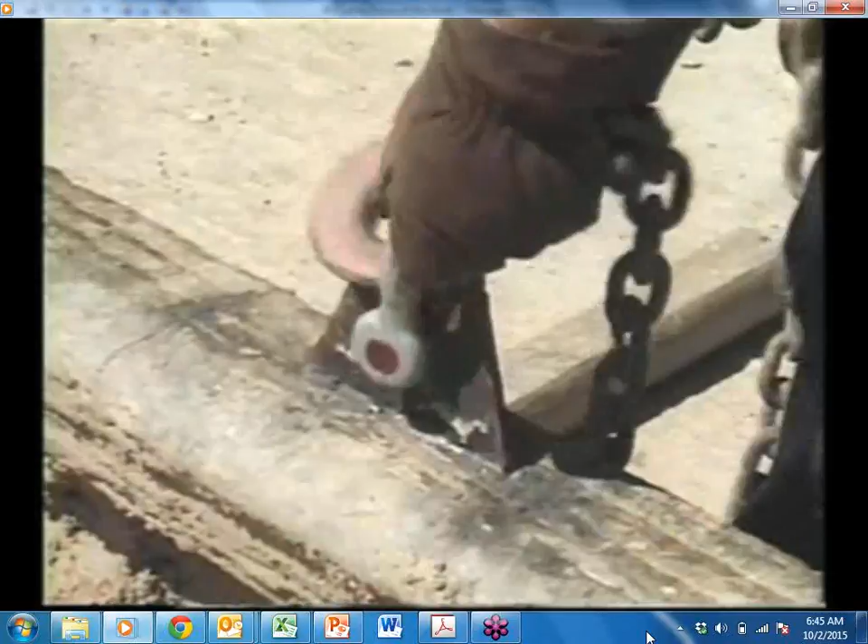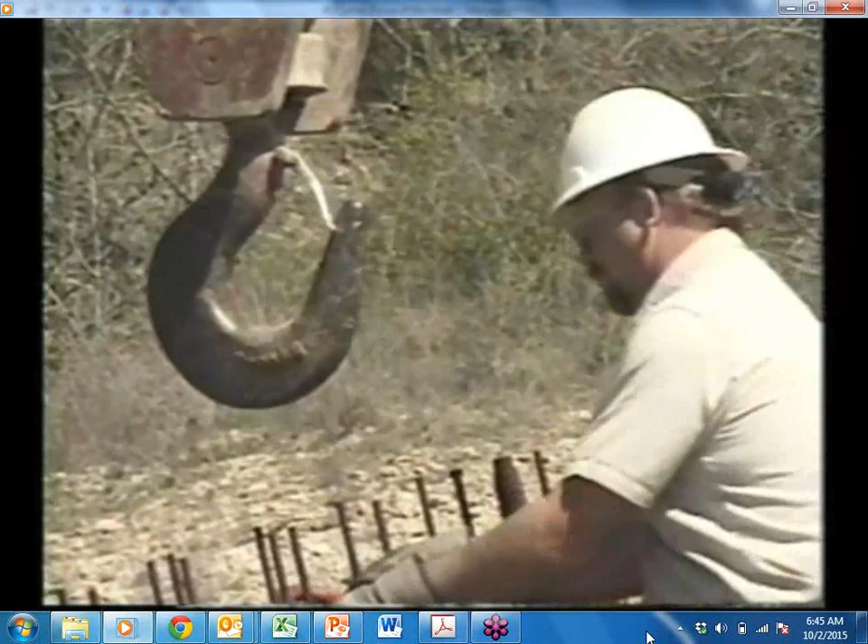Never shorten or adjust a sling for length by knotting or twisting it. Knots reduce the strength of the sling by at least 50%. When using lift hooks, always place slings in the base of the hook to prevent tip loading and possible fouling of the latch. If the lift eye doesn't fit into the base of the hook, use a shackle. 2 or more slings may be used in the base of a hook, provided that the included angle does not exceed 90 degrees. For multiple slings, use a shackle or ring to gather them at the base of the hook.

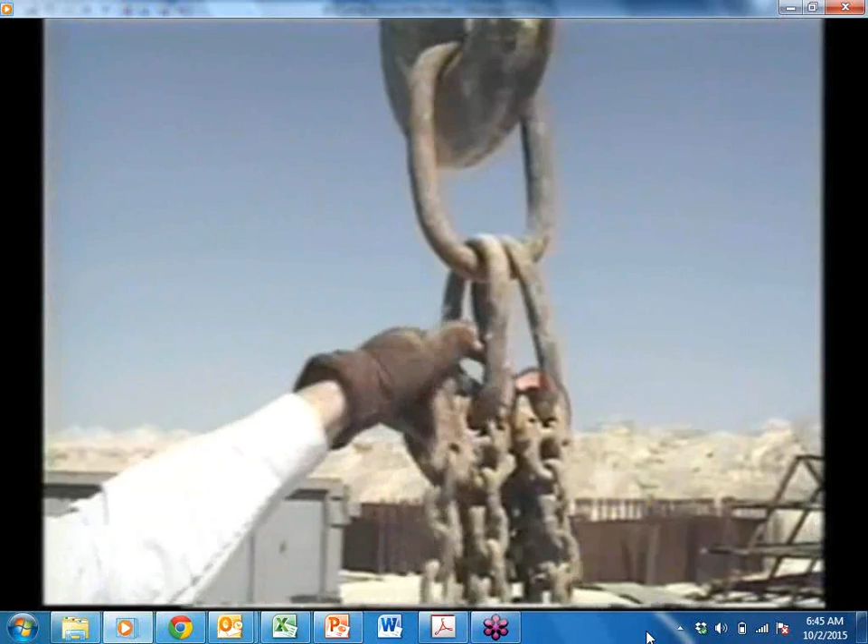The double wrapped choker is really, really great to use out there in the field. And they had some other good ones, keeping the tags up high. And with our chains, you've got to make sure when you're using your chains, again, use 2 legs as you're working the capacity, not 4, like they said. That gets people into some trouble. So really good techniques. Hope someone learned some new rigging techniques.

Again, this is very important because we do a lot of this now. We want to make sure we're keeping our rigging up to par and it's not getting damaged, and proper rigging techniques, such as you've seen in this video, are a way to make our rigging last longer. And it looks real professional out there when you guys are lifting level and you know exactly what you're doing, having taglines, everything. We have a nice, clean, organized job site. It really does look good, nice and professional.

Is there anything to add with rigging today? No? Any special lifts or something awkward or something really heavy? If you're at all uncomfortable, even if you're not, if it's something different like that, let us know. Yeah. We'll analyze it for you.